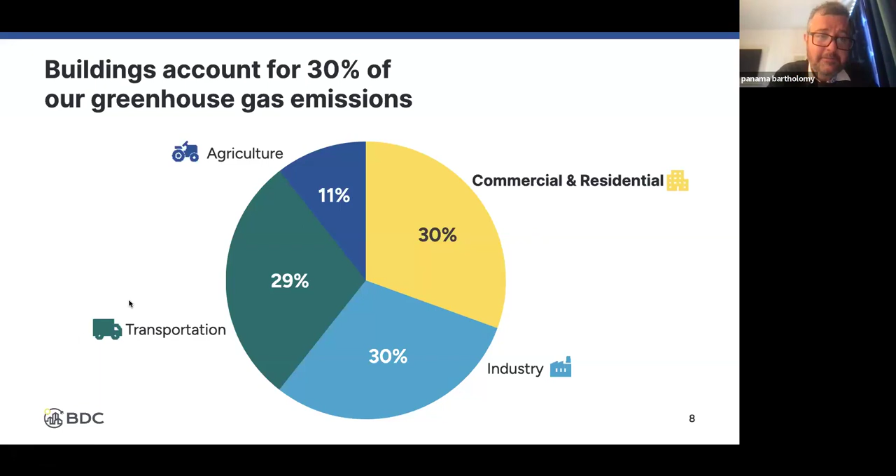You have many states working on greenhouse gas measures, cap and trade measures, greenhouse gas targets, net zero energy by 2040, 2030, or 2050 - it depends on the state. Many states are also working to clean up their grid, but very few are taking a particular approach to zeroing out the building sector. We need new, effective, and fast ways to get to scale on the building sector and get our buildings onto increasingly cleaner electric grids.

There's a lot of work to do. We have a lot of buildings, and it could take a long time if we follow the current market model. The vast majority of these buildings are single family, which presents real challenges when thinking about how to reach scale and get to net zero or zero emissions by 2050. We have about 25 years, but a lot of buildings to go. We need to figure out the market models and policy levers needed to get all these buildings to eliminate their pollution.

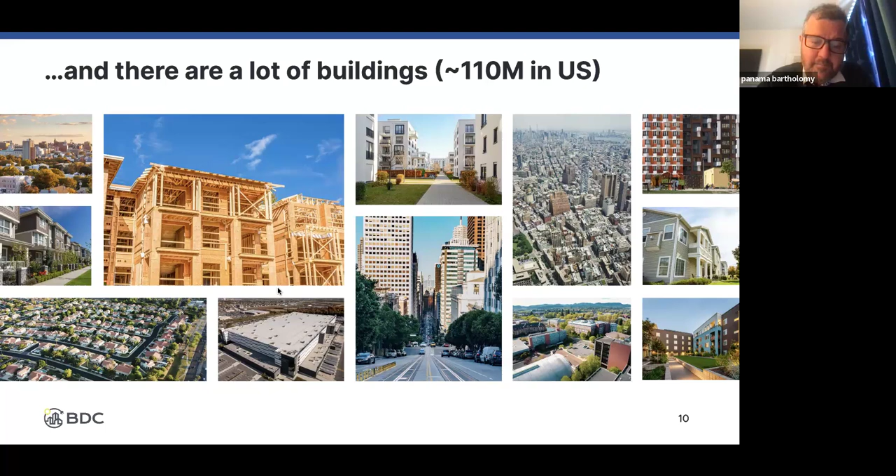The current market model doesn't lend itself well to meeting those goals. It's based on replacing an appliance when it breaks - about every 15 to 20 years for a furnace or boiler, every 10 to 15 years for a water heater, and about every 20 years for a gas stove. It relies on a whole series of different market actors working with disparate levers and value propositions.

If we're transitioning from one technology to another, say from a furnace or boiler to a heat pump, it requires interaction and understanding from the consumer to make the shift, and pushes the supply chain to change as well. There's a whole series of inefficiencies, inequities, and problems in expecting the current market model to completely decarbonize the building stock within the next 25 years. If we have 110 million buildings, that's perhaps 500 million individual decisions on appliances to be made, and we're hoping the current market model gets that right every time.

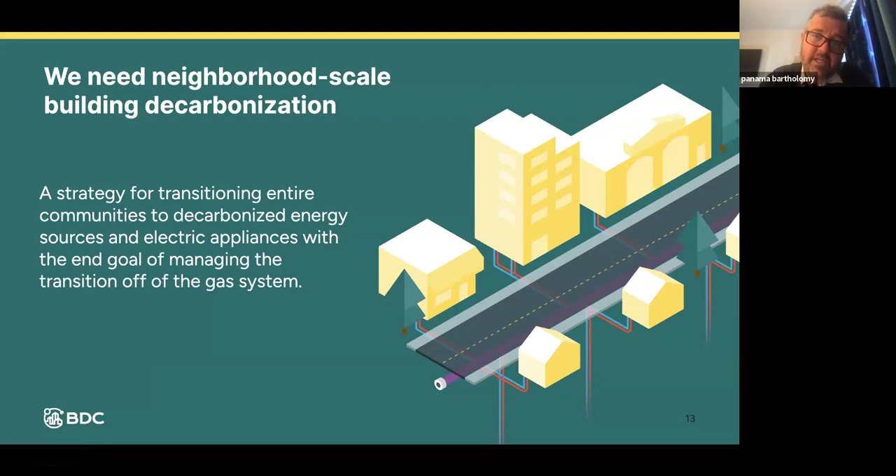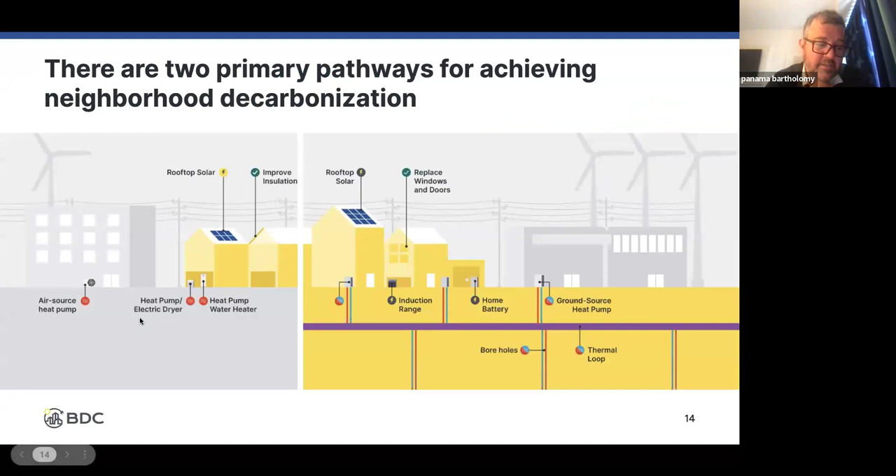Currently, we've identified in the white paper two primary pathways for achieving neighborhood decarbonization. I'll briefly cover them. One relies upon the electric network, and one looks at a new thermal energy network.

So the electric network approach is what Rachel from Pacific Gas and Electric will be talking about. This looks at taking whole neighborhoods off of the gas grid and putting them onto the electrical grid, replacing all of the appliances with electric appliances, making sure that the neighborhood is ready for the increased load, and providing all of the support to building owners and occupants needed to make this transition.

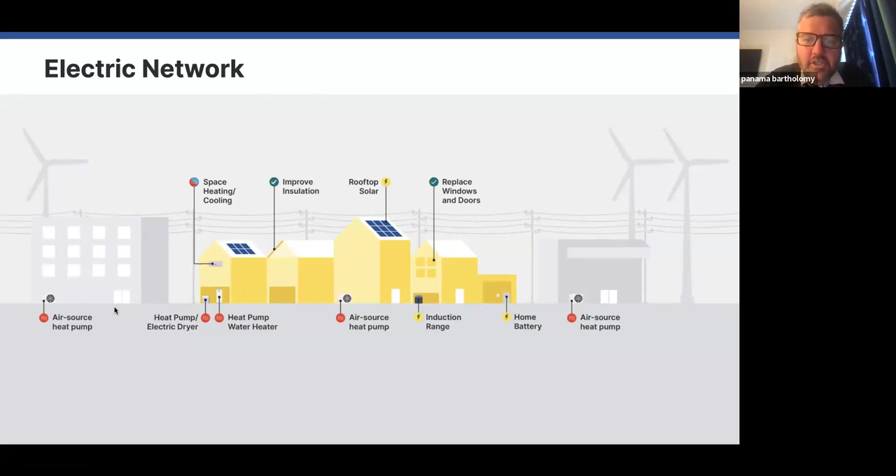And the utility taking a really big leadership role in this process. Next slide, please. The other major market model—again, these are the market models that are emerging right now, not to say these will be the only ones, but the two that are really part of the heavy discourse right now that we'll be covering today are thermal energy networks.

This is the opportunity to be looking at interconnecting buildings on a thermal energy loop, where you're taking pipes that are largely the same pipes we use for the gas system right now. Instead of putting fossil fuels through them, we put moderately warmed or cooled water through, and plumb that to each individual building to put it through a heat exchanger and use that for heating, cooling, and potentially space water heating as well.

This has particular benefits, as Jared will cover, in areas where it gets very cold in the United States and other countries, and to be able to manage peak demand in the winter from extreme heating climate areas. Jared will talk about all the benefits of thermal energy networks in his presentation. Next slide, please.

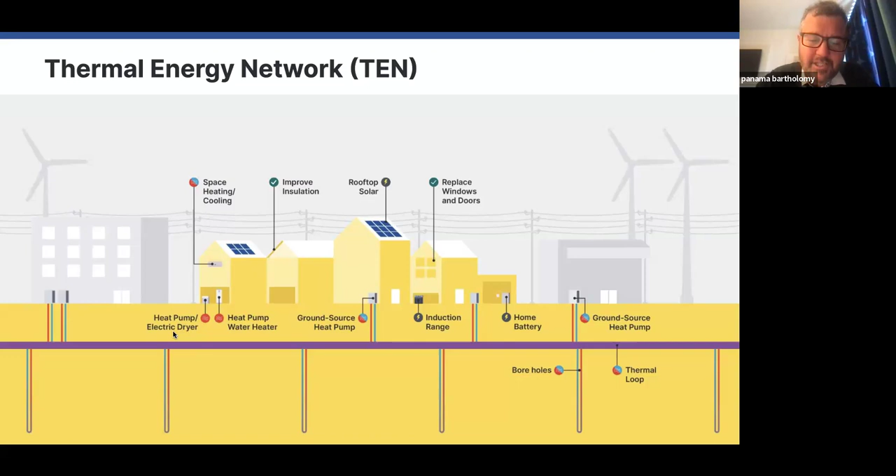We would love for you to read the report, offer us any feedback, and reach out to us to partner. We're going to be doing a number of things in follow-up to this. We're currently about to contract to build out a model for thermal energy networks to look at technical feasibility and cost effectiveness, and how to apply thermal energy networks within different areas of the country. We're excited about that, and we'll be doing continued work in this area on the policy, market transformation, and consumer education side. So please do check out our report and offer any comments.

Next slide. And with that, I'm so excited to bring in Rachel—just a brilliant member of the building decarbonization community and at the forefront of this topic right now. We're excited to have Rachel in. Rachel, please take it away and tell us what's going on at Pacific Gas and Electric.

Happy to, and thanks all. Really appreciate this great group this morning, and finally made it in. So some fun tech issues this morning.

As Panama mentioned, my name is Rachel Kuykendall. I am a strategic analyst on PG&E's decarbonization strategies team, which is a pretty fun team. We actually take what we need to get to for our decarbonized 2045 energy systems and help the company think about how we get from where we are today to that net zero energy future. For us, neighborhood decarb plays a big role in that.

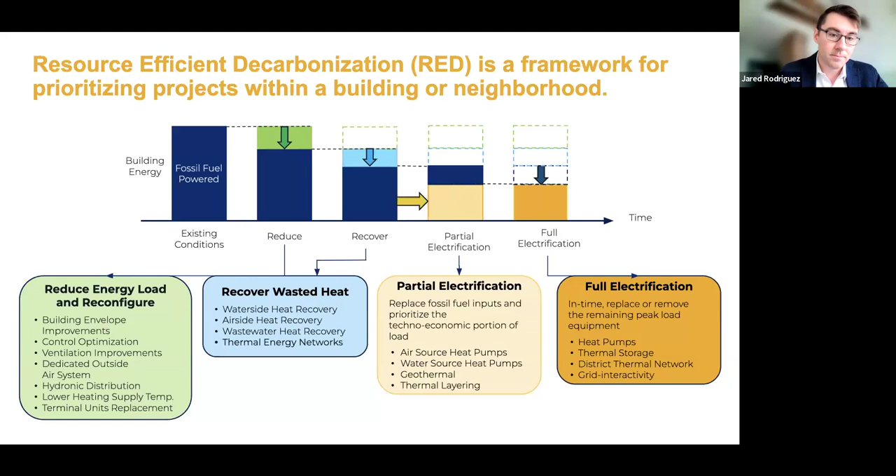So all paths to resource efficient decarbonization and decarbonization of cities in general require heat recovery. We cannot keep doing this. We have to think about how we're going to capture the heat that we're throwing away and get it back in buildings when and where we need that heat, across time and across space. For those who didn't know, cooling produces heat, right?

It's the opposite of heating. Cooling produces heat—anytime we're cooling, we're moving heat away, and anytime we're heating, we're moving heat toward.

Heat goes down the drain. We heat up all of this water so that we can take a shower. It passes by our body in less than a couple seconds, goes down the drain and into the sewer and onto the wastewater treatment plant, hopefully.

Think twice about ventilation, especially when we're in cold climates. We ventilate our kitchens, our bathrooms, our office buildings, and we just blow all that conditioned air—whether it's cooled and dehumidified or heated—right out the roof into the air. It really makes no sense.

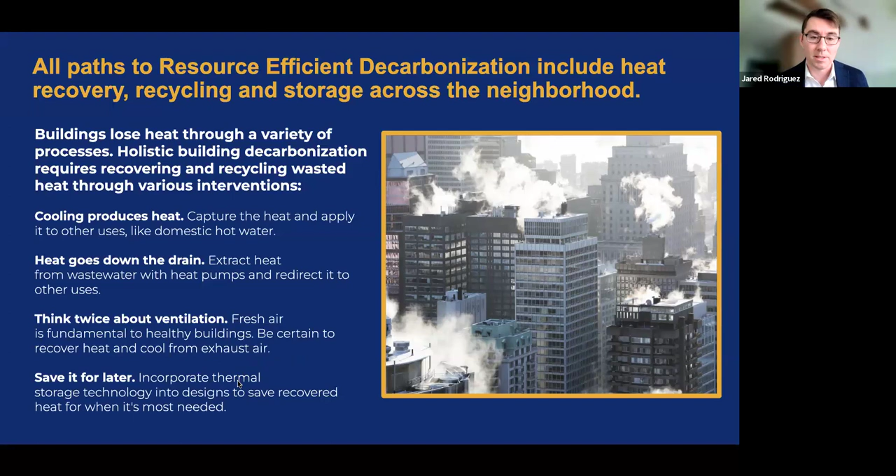So we have to think twice about ventilation and how we can incorporate heat recovery there, and save it for later—incorporating thermal storage to whatever extent we can. Thinking about thermal storage before battery electric storage is absolutely critical if we're trying to contain the cost of decarbonization in general and across the economy.

Neighborhoods offer different thermal energy resources. Every neighborhood, every community is different—we can't say the approach is going to be exactly the same in every block. There's a variety of thermal energy resources and waste heat sources available on each block, in each community, in every downtown, that could be tapped and stored and moved appropriately so we aren't stressing the electric grid, so we don't have to overbuild it the way we're typically used to discussing.

If it's going to cost $1 billion, for example, in part of Manhattan, to demolish part of it to add a new substation so we can electrify buildings, maybe there's a better way. I'm not saying that's the example that applies everywhere—that's an extreme example—but maybe there's a better way.

So thermal energy networks, or TENs, are needed to complete resource-efficient decarbonization and achieve that goal by storing, capturing, and moving heat to where and when it's needed.

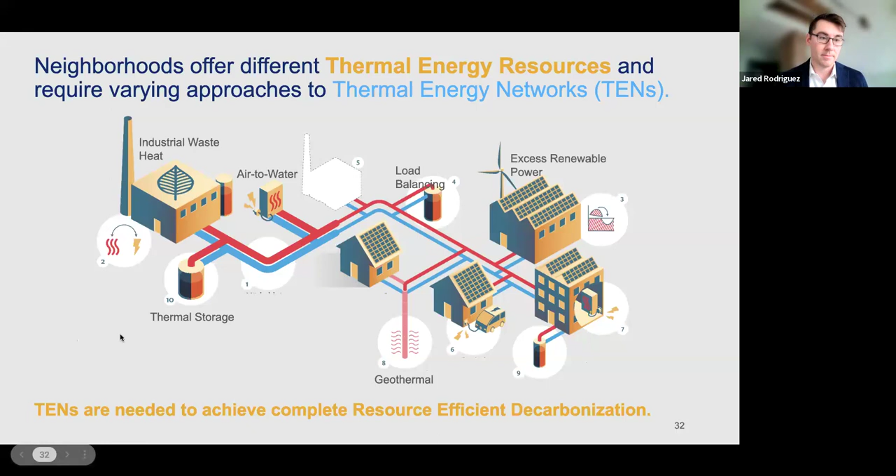Playing matchmaker is also super critical—this is really important. First and foremost, you need to define who can play that matchmaker role in any particular community. Is it the utility? Is it local government? Is it an organizer or an organization? Who is it, who can help do that?

Can we create a coalition that identifies where those thermal pairs are, where a network might begin, and how it can expand over time to achieve bigger goals—how do we avoid making massive investments in our infrastructure system, how do we accelerate decarbonization with an equity lens, and how do we bring decarbonization more into a conversation around economic development than a conversation about new cost?

Or a cost that wasn't expected. We're starting in not a great place—we're having to convince people that this is difficult and that we need to sacrifice. That's not what this is. This is an opportunity to position your downtown, for example, to compete in the 21st century and potentially have lower operating costs than it would otherwise. So we have to reframe and use narratives to get people to think differently about this issue.